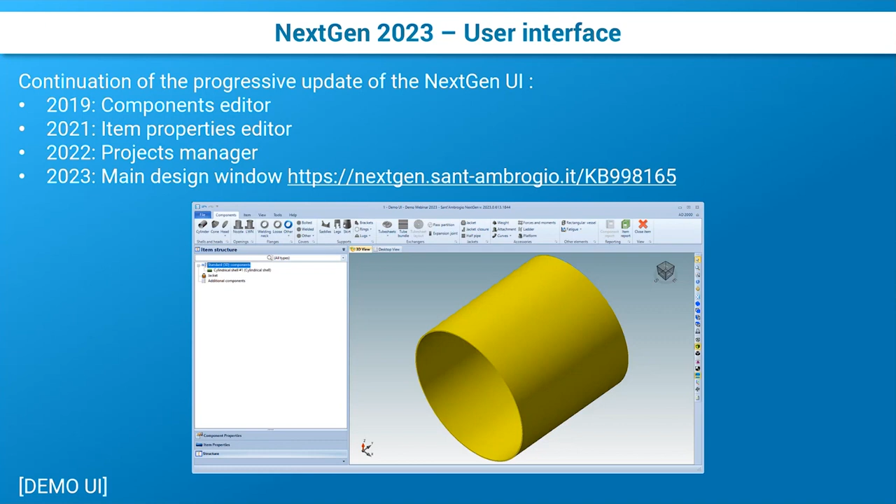Okay, as soon as you start NextGen, you have the project browser. This is the window that we already changed last year, and we added more features even in the last version. For instance, you can ask for support straight from this window. So even if you can't open your files, maybe you have some issues with your files, you can ask for support from here.

Then we added some tools here, for instance, the ability to open your materials database from here, check for updates, and some diagnostic tools that may be useful if you have some issues and our support team asks you, for instance, for the program log to be sent via email. So some small updates to this window.

Then once you open your NextGen, you notice that we replaced the toolbar on the top and the menu on the top with this ribbon bar that is more modern, but the interesting thing is that we are now able to let you know when a feature, a component, is not enabled, and the reason why that component is not enabled.

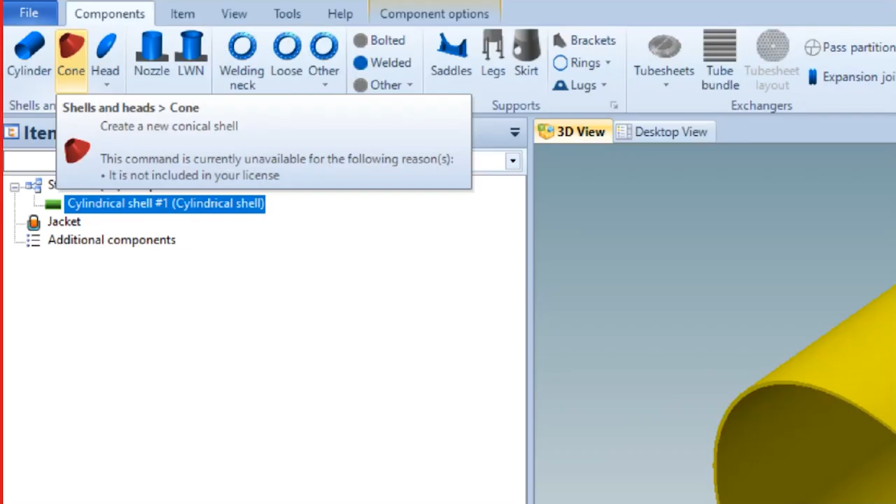So for instance, I have an AD 2000 calculation here with just a cylinder, and I'm trying to add a cone, and you see that my cone icon is highlighted in red, and the command displayed shows that this command is currently unavailable because my license does not include that. So we have an explanation of what's happening and why I can't use something.

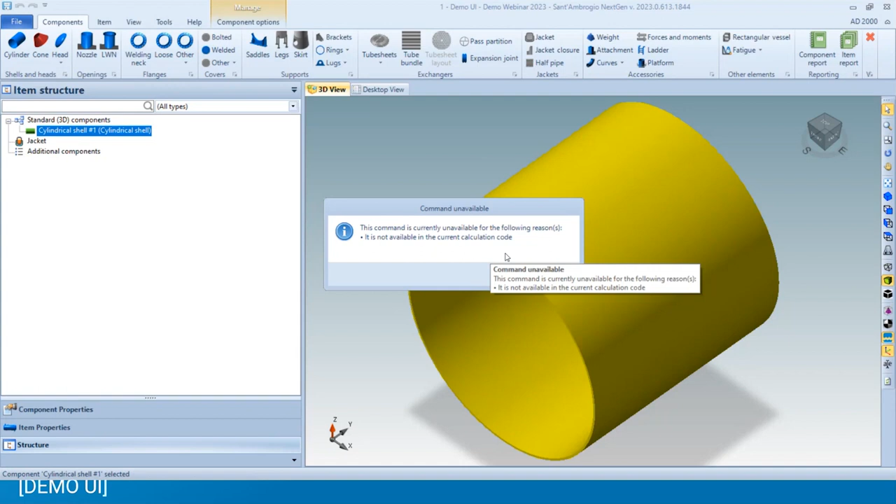This is quite obvious. It was already present in the previous versions, but we have expanded on it. For instance, here we have elliptical heads. Elliptical heads are not supported by the AD 2000 code. So if I click on the elliptical head, the program explains that I can't add this component because it's not currently available for calculation code limitations. Same goes for other components.

For instance, this one, brackets, you can see, let me zoom a bit in, that command is unavailable because it can be only available for vertical items. So I need to make this item vertical. Or again, because this component is available only for heat exchangers. So we have more a tooltip that explains why we can't do something, while previously we only had information about components and features that were actually available in that moment.

There are some other features in this new window. For instance, once you select a component, you already had in the previous version the right-click contextual menu, so the ability to act on a single component by right-clicking on it, and now we have expanded it with this contextual toolbar. And for instance, from here you can hide the component or make it transparent, or you can quickly change its color, if you want.

And other contextual options are available here, like the ability to insert components between other components. And so this goes in terms of discoverability of the features that are available to you. You have all the features available to you very visible within these menus. What else do we have?

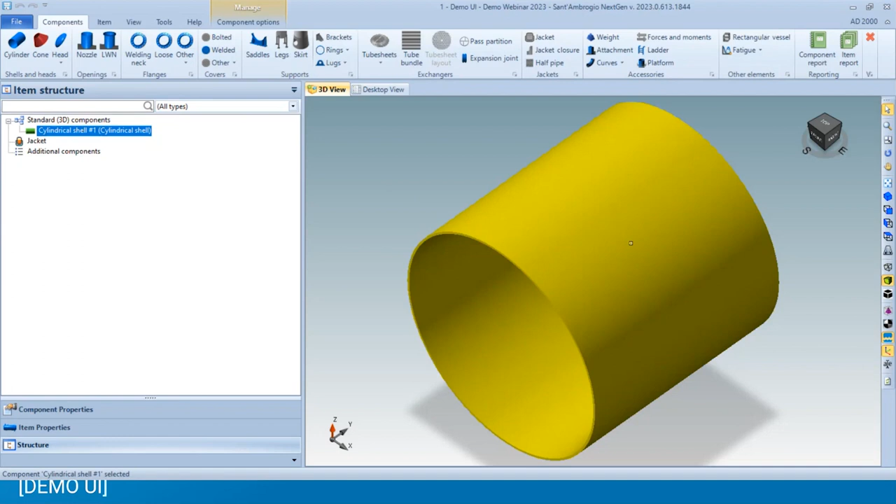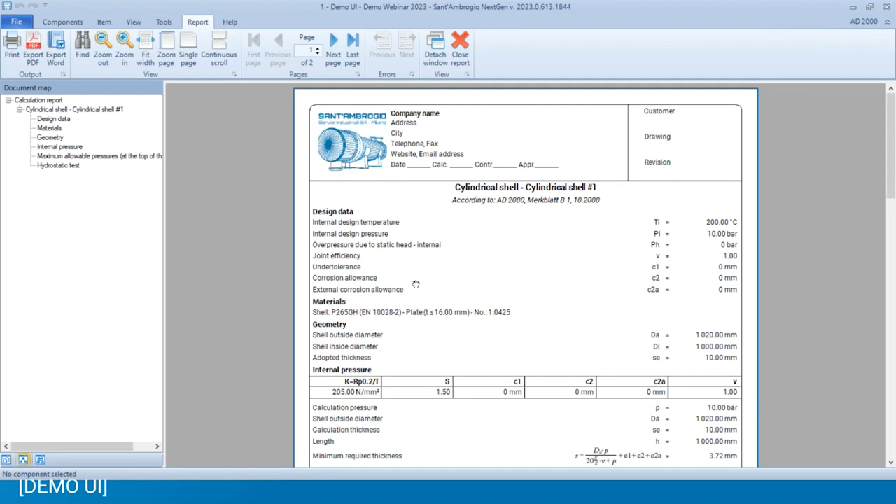One final word on the calculation report. If I print the calculation report, now the calculation report is integrated in the same toolbar, so you can switch between the report and the components window. But if you prefer an approach like what we had with NextGen 2022, you can detach this window, and you have a separate window for the report, and a different window for your 3D environment.

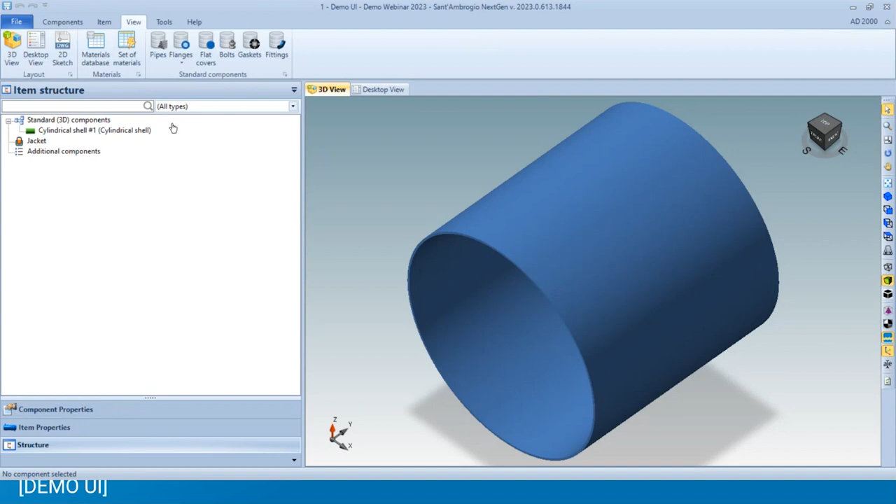So that's it. I think this is a good update that will let you understand better what you can do with NextGen, and also maybe discover some more hidden features that were buried under the menus and now are more apparent. Okay, let's close this item.

Don't save it. Sorry, Matteo, you have a question in the chat. Okay, let me check. Why is it not possible to add legs and skirt at the same time? Of course, one of them will be used, but sometimes I'd like to check which way is better.

Okay, this is by design, the fact that you can't add multiple supports on the same item. It makes it a bit difficult to manage which one is active, because, for instance, if you have both skirt and legs, the weight of one support would be added to the overall weight of the vessel, and act on the other support. So it would be a bit messy, I think. Also, in terms of user interface, you would see the two components.

So my suggestion here is just to create your vessel, add one support, and then duplicate your calculation from the project browser. You can duplicate from here, and then remove that support and create the other one. It would be a bit difficult to manage multiple supports.

Okay, let's continue with the presentation. Okay, we have seen the user interface updates, and now I would spend a few words about the usage factor. Usage factor is a feature that was present in NextGen since many years ago. Recently, in the last year, we have revamped it and polished it and made it more usable and useful.

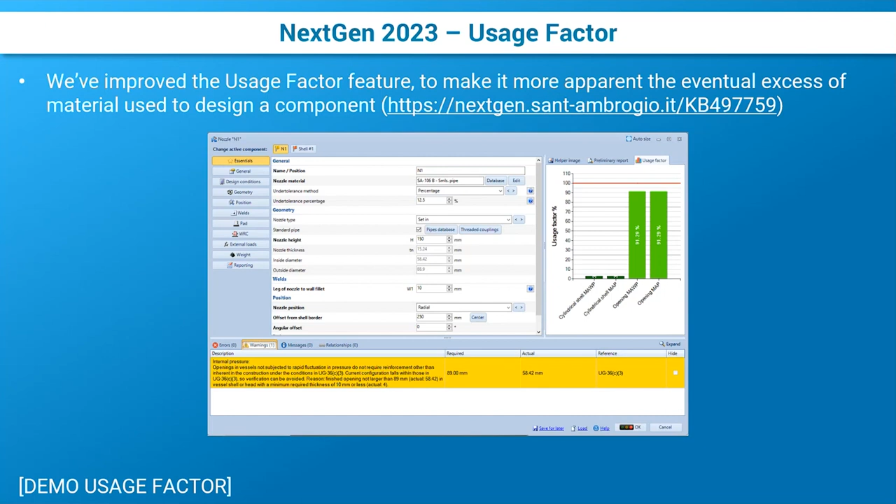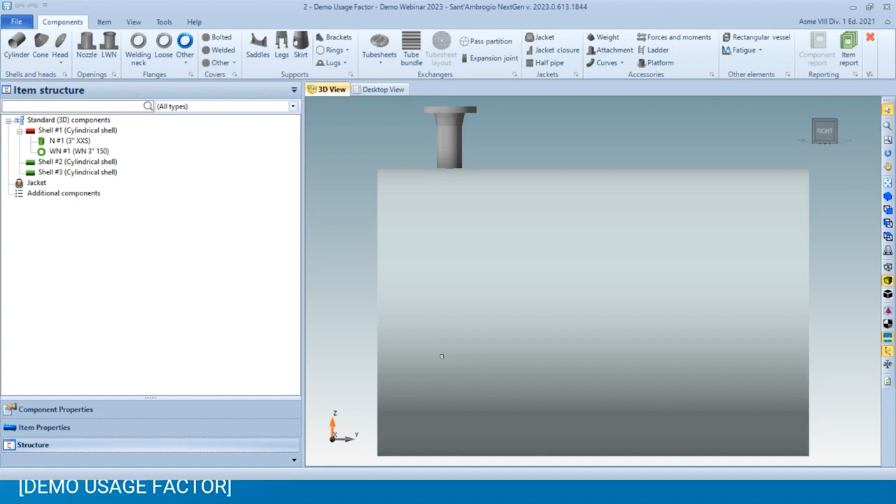So the usage factor basically is the feature that lets you understand how much material you are actually wasting in your calculation, because sometimes you have a scenario like this one where I have 3 cylindrical shells, you see, and obviously I have this cylindrical shell that is not validated, so I expect this cylinder to have insufficient thickness.

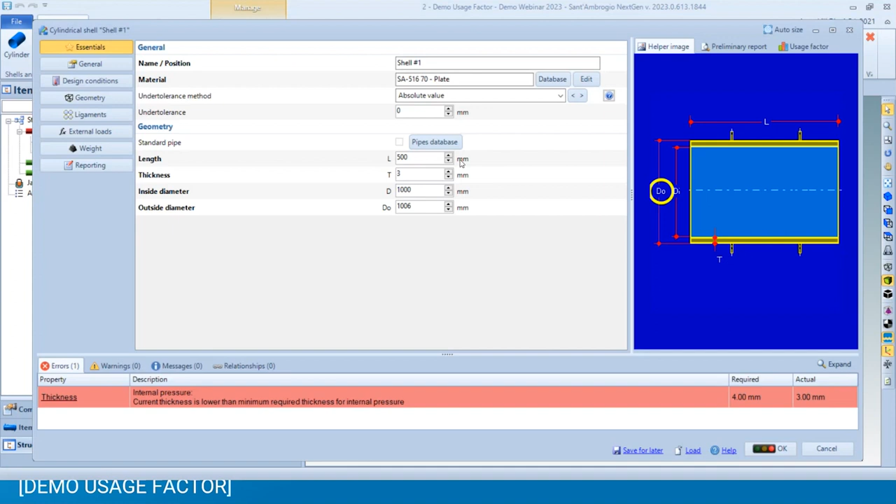So I can just open it, and okay, the minimum thickness is 4. Let's see. Okay, 4 is fine, and then everything is okay. So in this case, I expect my calculation to be fine in a way. But if we dig deeper, we see here that we have this component that is using almost all of its material, and the same goes with this one. But if we check this one, you see that we are wasting a lot of material.

This is how the maximum allowable pressure stacks compared to the design pressure. So it's a ratio between the two pressures, and we are actually using only 20% of our maximum allowable working pressure. This happens because I have a thickness of 20 millimeters compared to the minimum thickness of 4 millimeters.

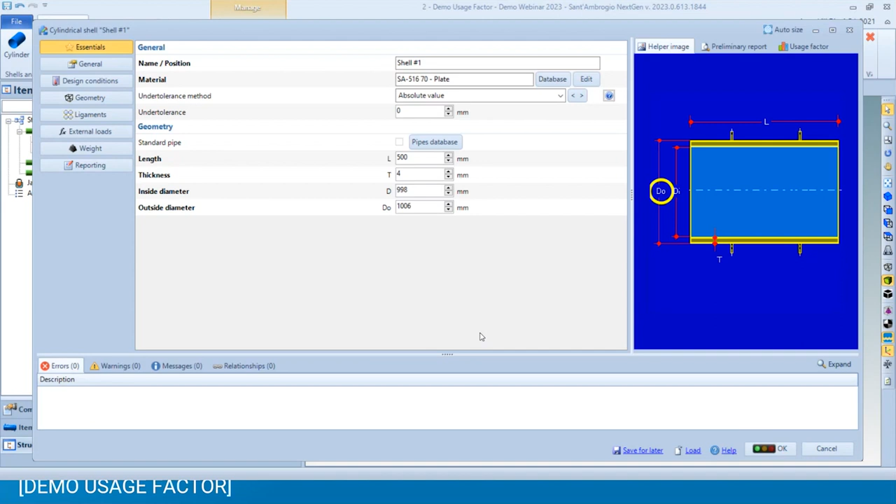So it's very obvious when you are under designing something with NextGen, because of course you have a validation error, and the best approach is to follow the direction given by the software and increase the thickness. But sometimes you are just checking a file, a drawing, for instance. So you input the value that is written on the drawing.

So let's say the cylinder is 10 millimeters, but how much more than needed is 10 millimeters? It's a lot more, because all the material between 4, that was our minimum required thickness, and 10 is actually wasted, not used to resist the pressure. So you are creating a more expensive machine, using more material, wasting more material, and overall having a more expensive project. So I highly recommend you check this feature out, because it can be very helpful.

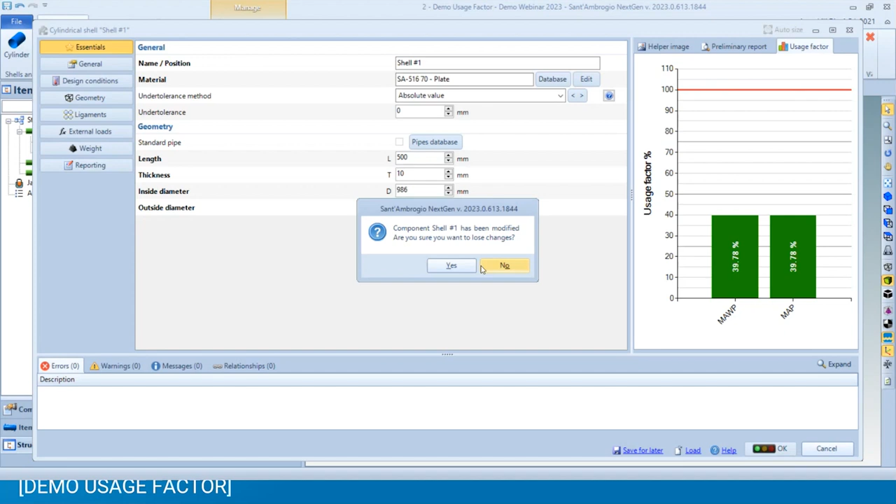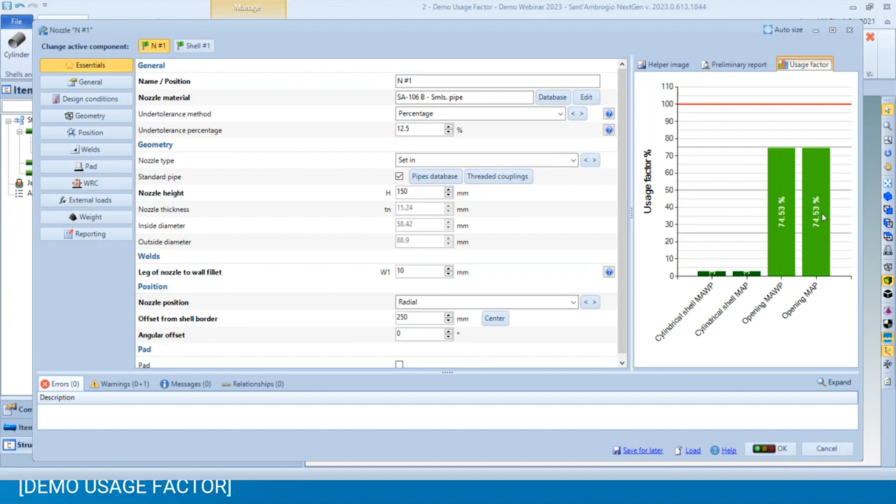Also with the nozzles, you have more information. In this case, we have the nozzle analyzed as a cylinder or as an opening, and obviously it is the opening that is guiding the process. So if you have this kind of chart, maybe you can decrease the schedule of your nozzle and use a lighter pipe. And same goes for flanges.

In this case it is a flange calculated not according to a standard, but with code rules. So we have the flange maximum allowable pressure and bolts maximum allowable pressure that are quite high. So we have a lot of material that is actually wasted. We can decrease the rating of this flange and use a lighter flange.

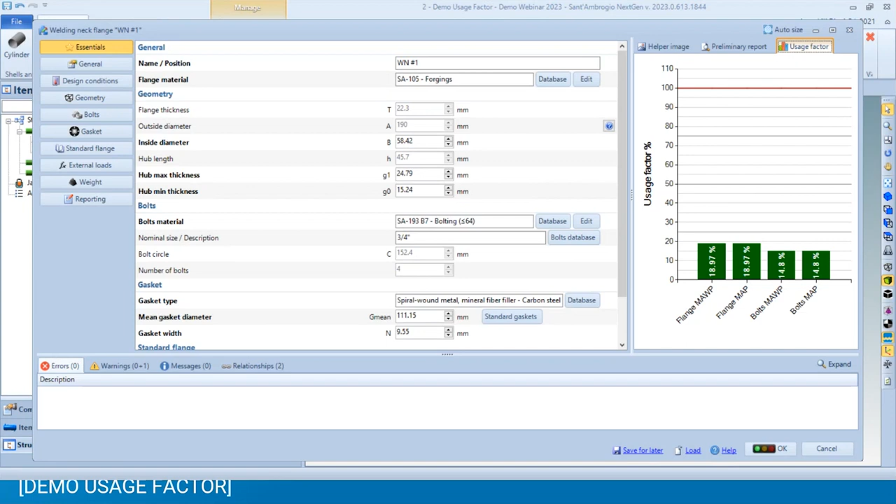And other than the usage factor within the component window, we also have the global usage factor. Under tools, you can use usage factor here and add one or more components and see how they stack one against the other. So we have these 2 cylinders that are using almost all their material to resist pressure, while the other one, C3, that is cylindrical shell 3, is oversized.

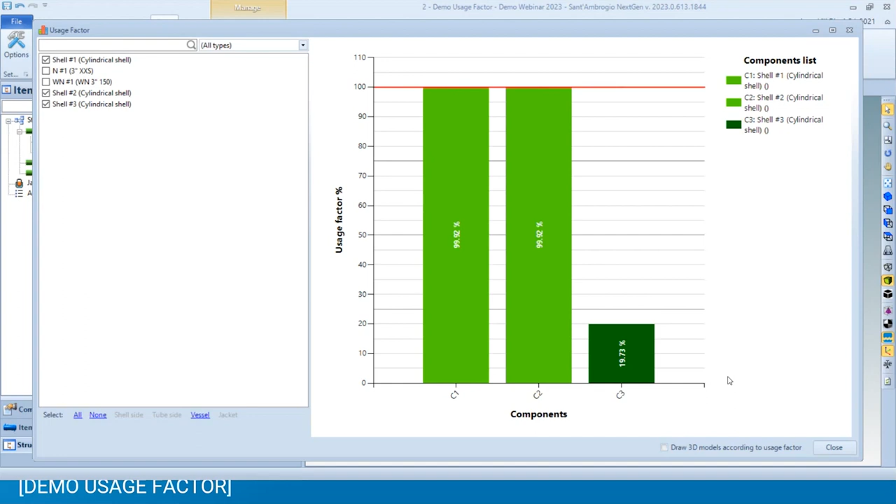Okay, we have a couple of questions. Is it possible to import files into NextGen from other pressure vessel programs? I'm afraid no. This is something that depends on every producer of software. We are kind of jealous of our file formats, so it's not very easy to interchange files between one another.

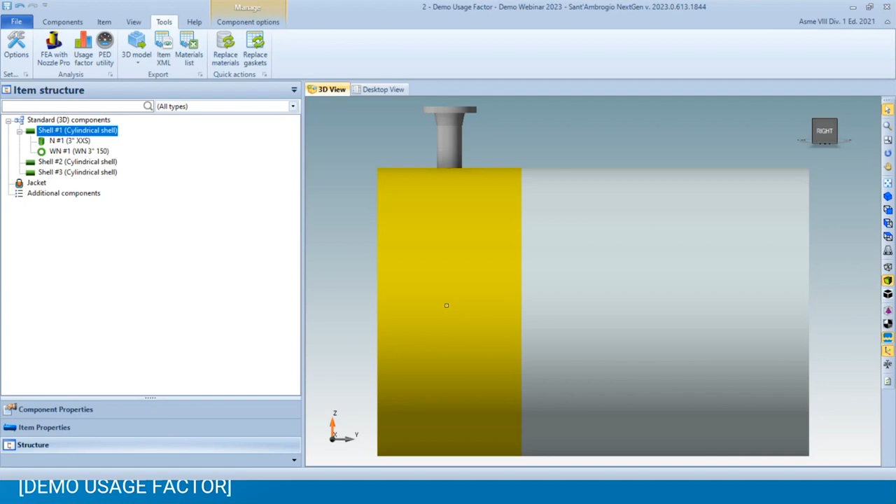Does usage factor compare to maximum allowable working pressure of the vessel or to the design pressure of the component? That's a good question. I think it's the design pressure of the component, because you usually have the same pressure for the component and for the whole item, but it could happen that you have different pressures there. Let's see what happens if we change the design pressure here and go down to 1. Only on this component. Yes, it changes.

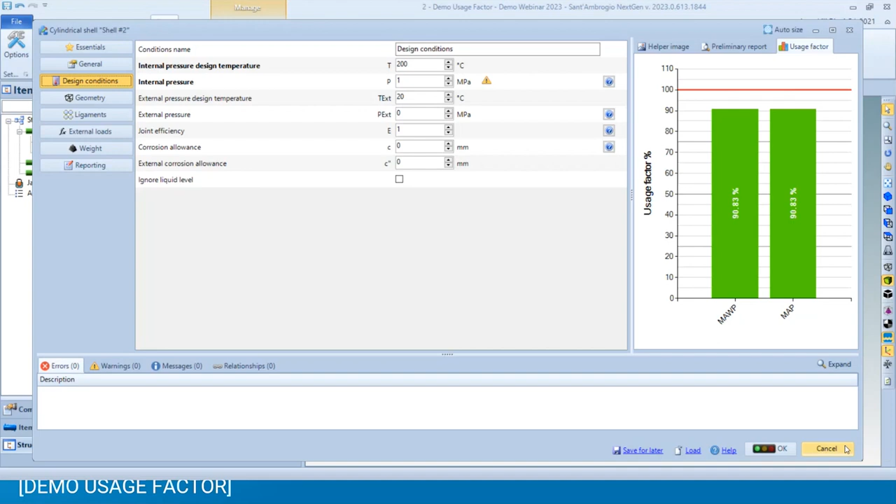So the component checks the ratio between the maximum allowable working pressure and the design pressure on a per component basis. Okay, that's it for the usage factor. And let's see what else we have.

Okay, calculation report. In terms of calculation report, we have made a lot of improvements in the last year. And we have now, first and foremost, the ability to produce a report using the current code prescribed units. This was available in a way in previous versions, but now it's more explicit. So if you want to stick to the units that are available for that specific calculation code, and I'm thinking about AD 2000 using bar for pressure, while other codes use megapascal.

You can do that. We have the printout of the local loads transposition to the support. This is available for vertical vessels, so vertical supports like legs and skirts. So if you have local loads applied to some of your nozzles, these loads are transferred to the base of the support, and now we have a page that shows you how these loads are transposed to the bottom of the vessel.

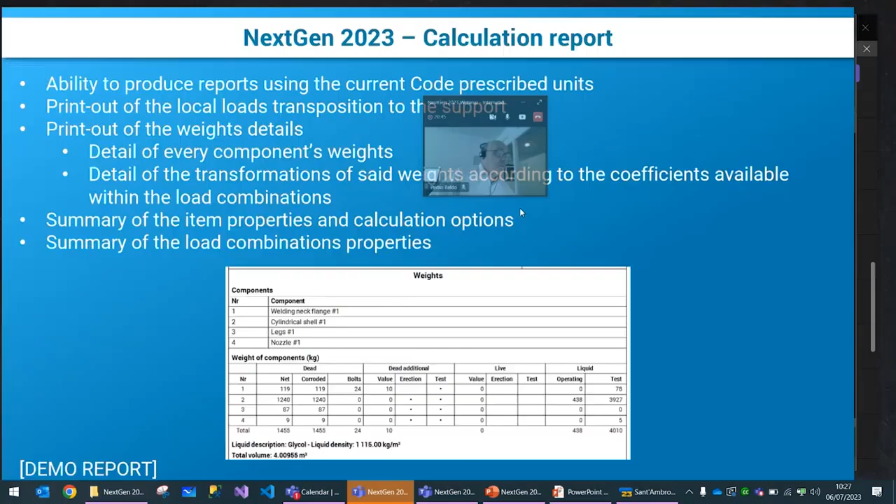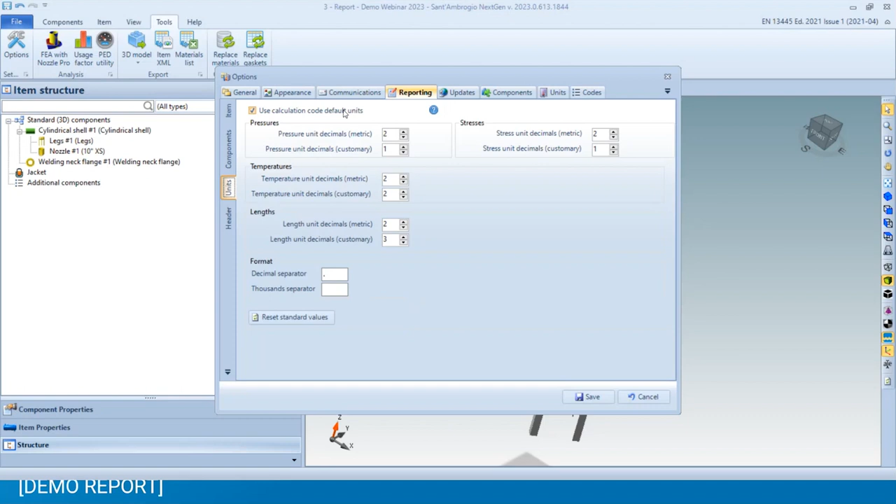Okay, report. So I have a vessel on legs here. And as I said, one thing that you can do now under tools and options and reporting for the units, you can stick to the calculation code default units. And this is an explanation of the list of the default units for each calculation code. Then let's print the global report and check on that.

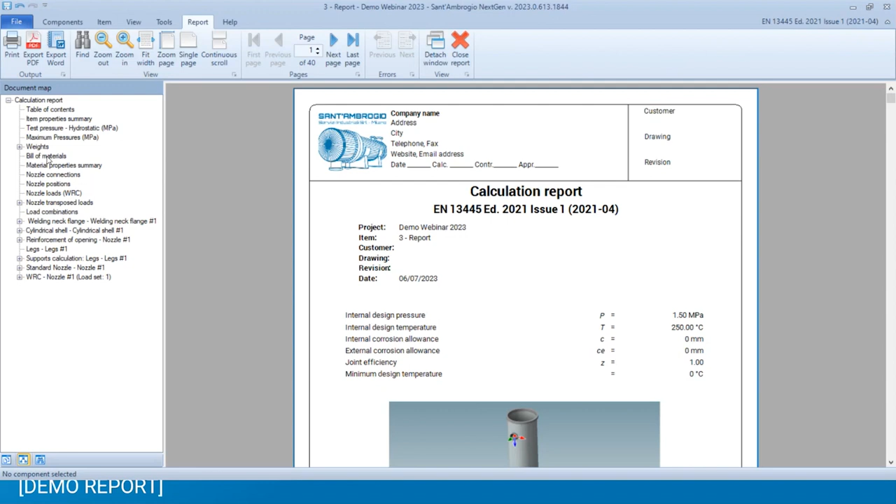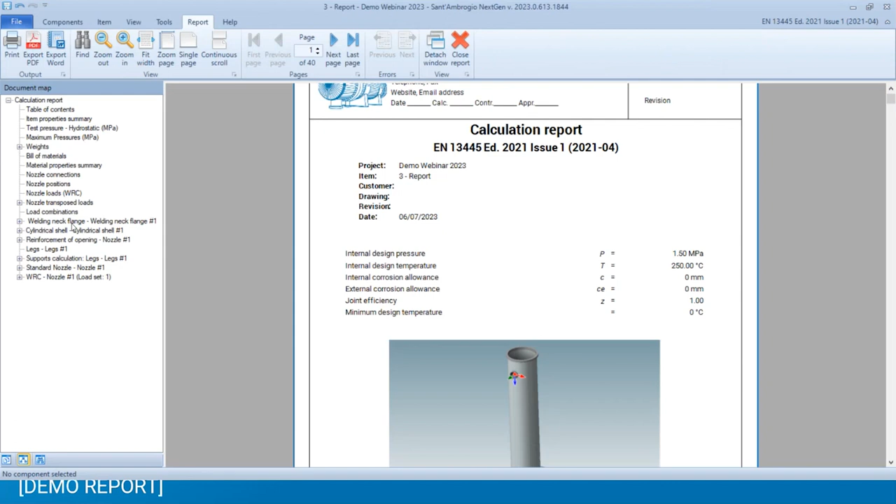Okay, this vessel has a nozzle here, and the nozzle you can see from the icon that you can activate by using this button here. You see that it has WRC enabled and local loads. So if we check the report, we have now the nozzle transposed loads. So this is the transposition of the loads acting on that nozzle down to the support. And this should be available also for horizontal vessels on saddles in the near future.

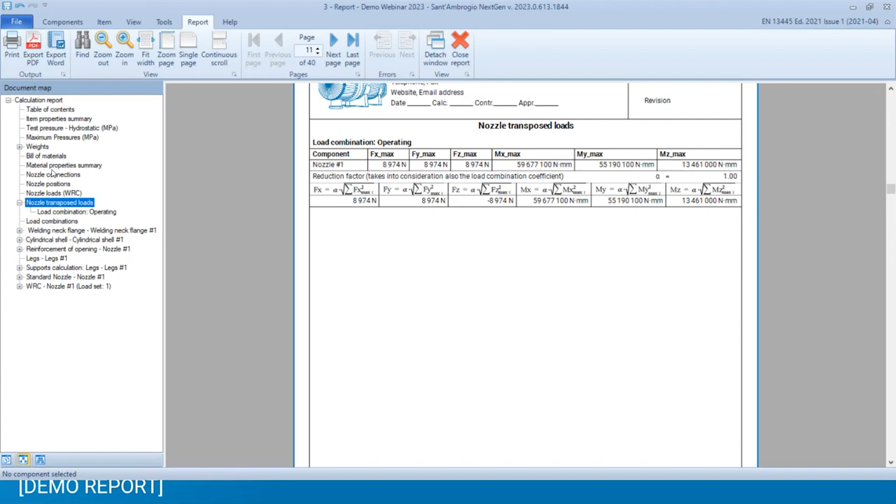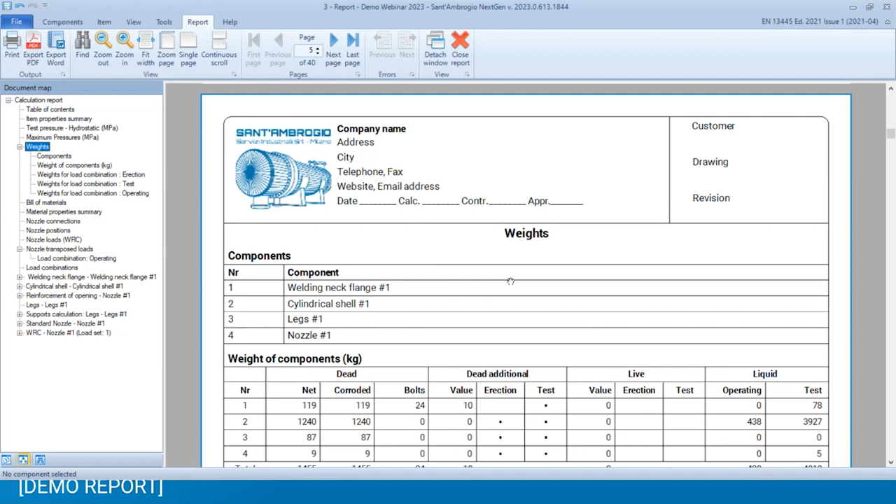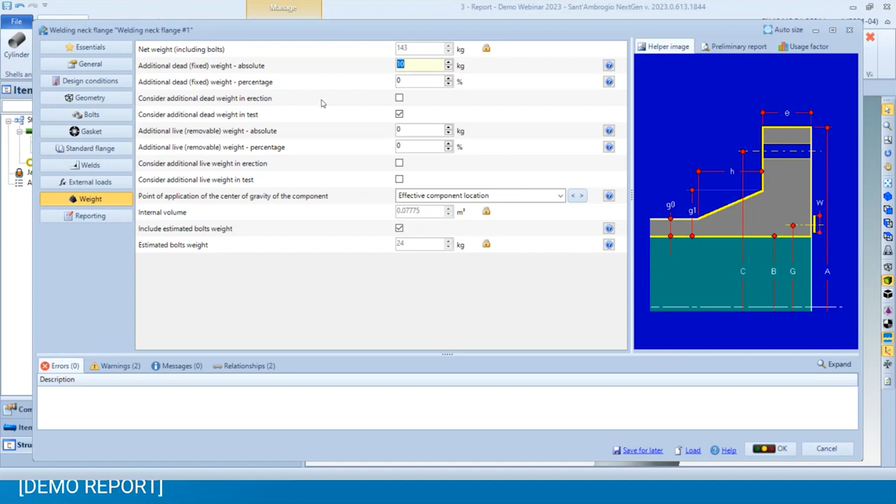Then we have the weights details. Okay, the weights page has been greatly improved now. You have the list of the components, and for each component, let me zoom in a bit. For each component, you can see that, for instance, here for the welding neck flange number one, we have included the weight of the bolts, and this is in kilograms, so 24 kilograms of bolts. And we have asked to not consider that weight in erection. This is something that you can manage from the weights page, weights category of the component. You see here, I have added 10 kilograms of dead weight, and I have asked not to consider that weight in erection. So we have these features reflected in our calculation report.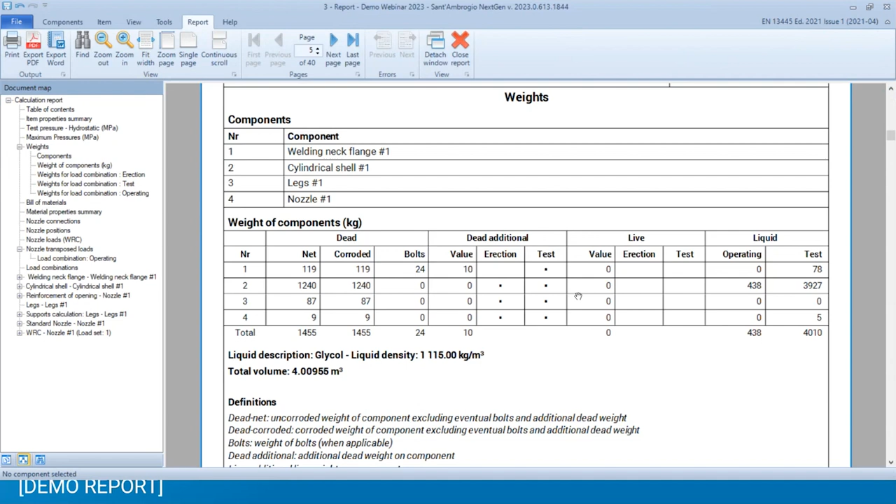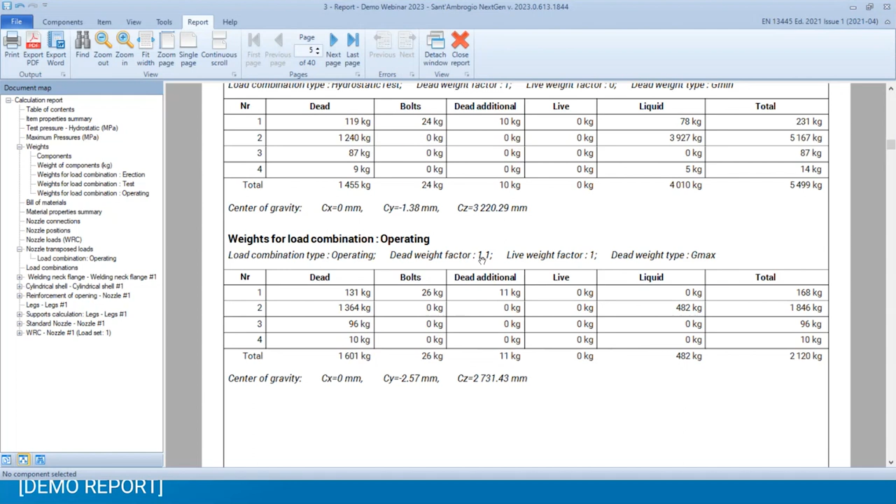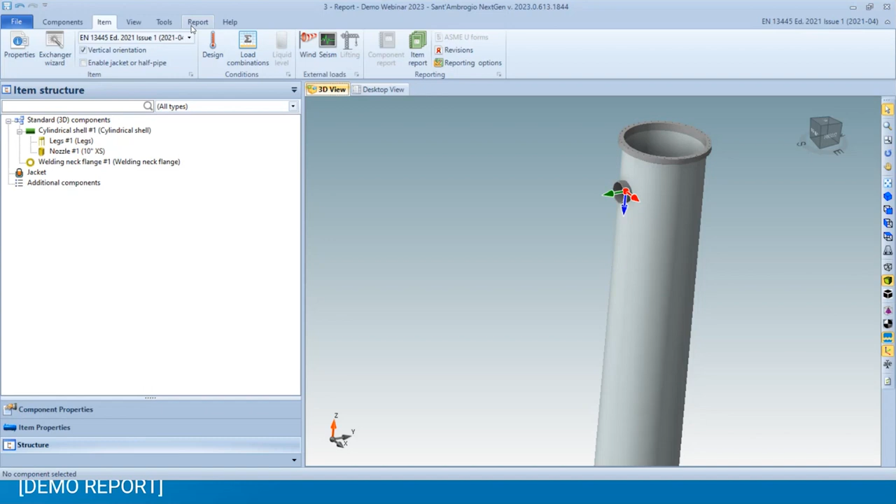And then what else we have here? We have the transformation of the weights due to the load combinations. So I have changed the dead weight factor to 1.1 for the operating condition. And again, you can manage your load combinations from here, edit. And you can see here, 1.1 as dead weight factor. So if I see my weights increased in the operational load combination, it is because I have multiplied each weight by 1.1. So I have a more precise way to explain why my weights are changing when transferred to the bottom of the vessel.

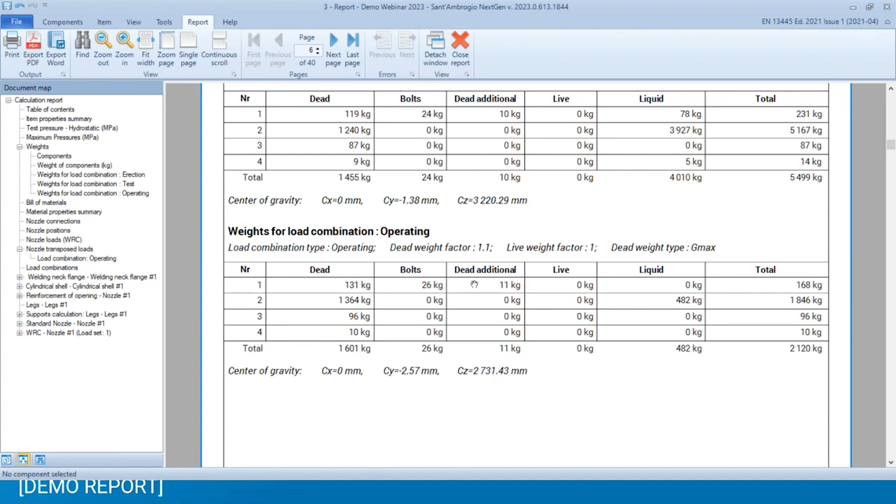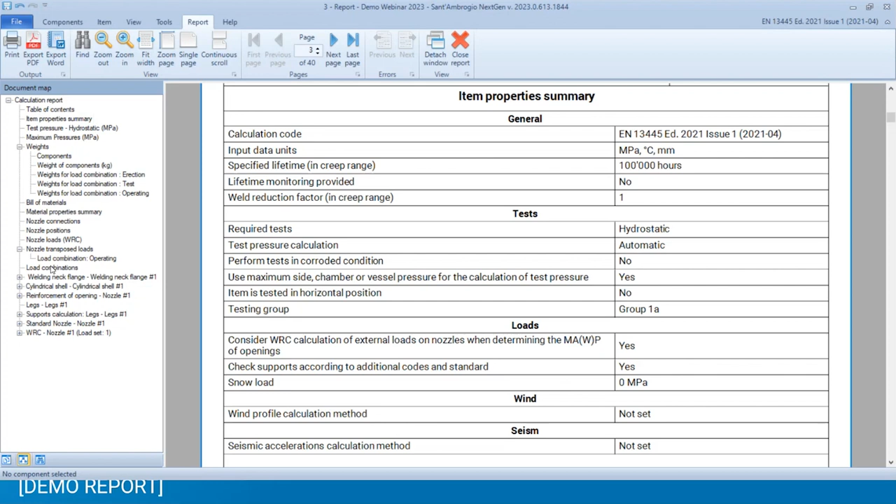And we also have a recap of the item properties. So these are the properties that you set when you set up your item, which test is enabled, if we included or not some of the options. And this can be helpful if you want to recheck items in the future and see how you managed to set them up. And finally, we have revised the load combinations recap.

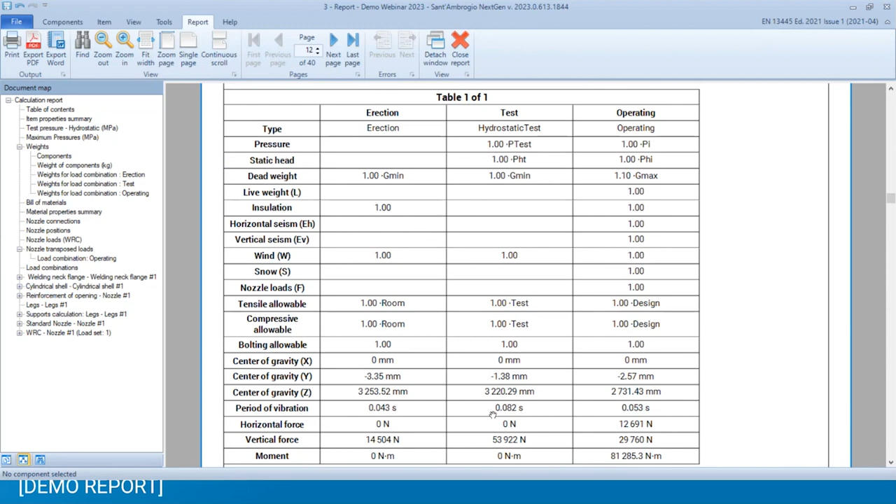So you have this summary with the load combination, explanation of the symbols, and a recap of the factors of each load combination. So this is again a progressive update of our calculation report, and we are including more meaningful information, especially in the structural calculation, ways to better understand how the vessel is behaving and how each load and weight is transferred down to the support.

Okay, I'm checking. There's a couple of questions. Is it possible to change the way loads are transposed? Some clients ask to transpose the loads using their own formulas like square superposition or reduction factor depending how many nodes are combined. At the moment, we can't change the way the loads are transposed. We are using the AD 2000 method.

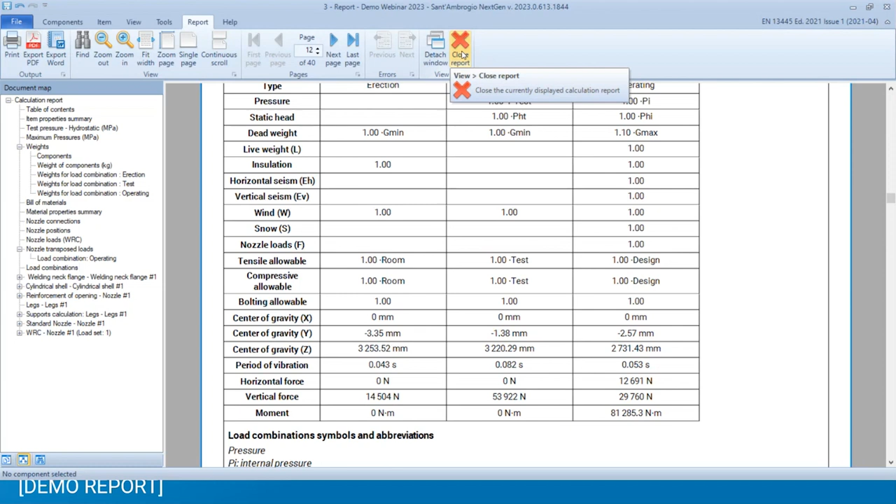Maybe we can check for the future if it's possible, or keep in mind that you can always override the calculation that we make for each load combination from here, and override automatic calculation. And of course, you lose everything, because not only the local loads, but every other load calculation. But this is an option that you have. Sorry, question? I want to add something, Matteo, in the load combination details window. Yes, please.

If you click on edit, you can actually choose the combination method of external forces from SRSS to algebraic sum. So we added this recent improvement to allow also the algebraic sum and not the square root of the sum of the squares. So okay, this is possible. Okay, great, thank you.

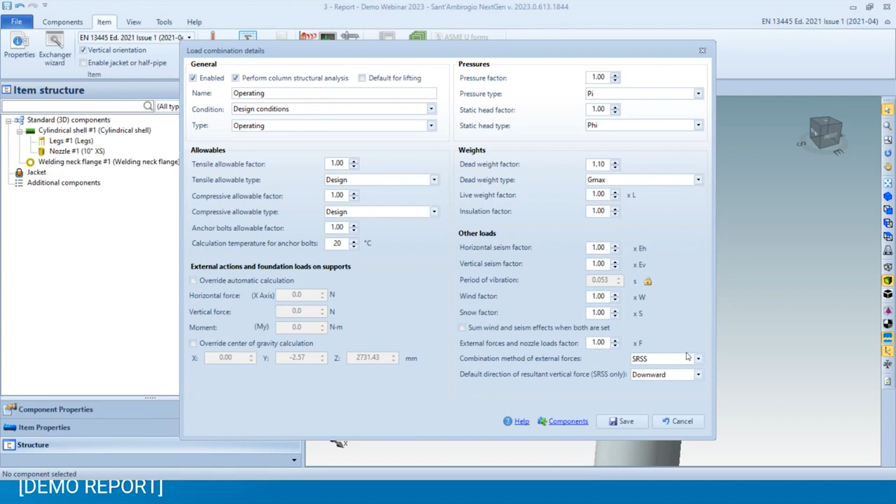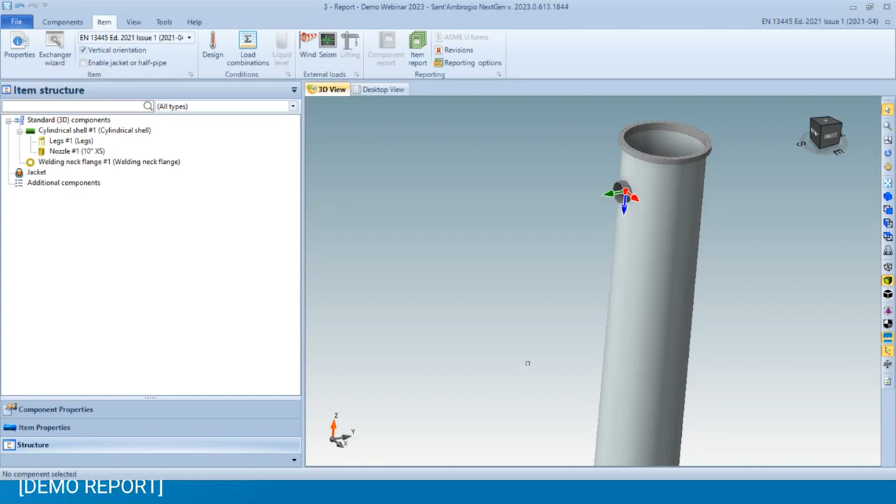By the way, this is Paolo, one of my colleagues from the office, and there is another question: why can't we add coils to the conical part? Well, basically, the answer here is that it is pretty difficult to draw the actual model of the coil around a cone, but I think that eventually we will add that feature too.

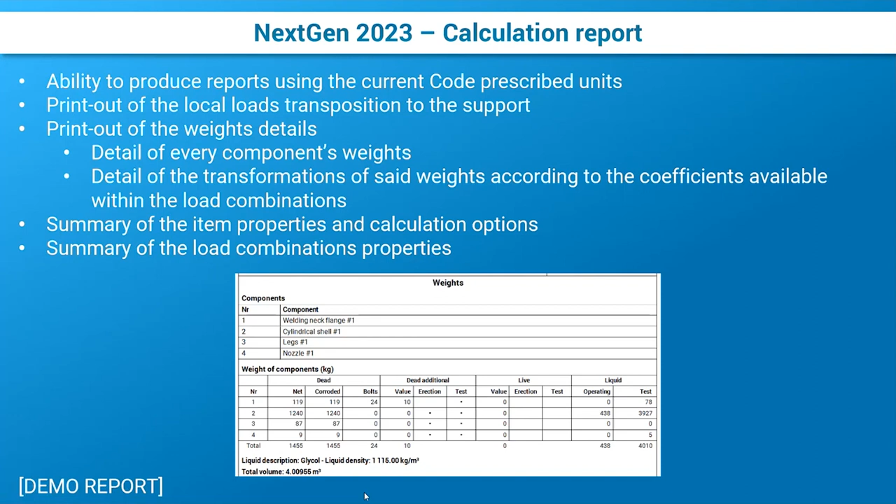Okay, let's see what else we have. Improvement to rectangular vessels. Here we were lacking externally reinforced vessels under Division 1, and we added them at the beginning of this year. So we now have a complete coverage of both internally and externally reinforced vessels in ASME Division 1.

Then we added a bit subtle feature that is the option to select which method to use to calculate the minimum thickness of a rectangular vessel face. This is displayed in the image below. So we have different methods to calculate the minimum thickness of the vessel face. This happens because the rectangular vessel method doesn't give you actually a minimum required thickness, but gives you means to check stresses in different points of the vessel, and so we have to come up with a trick to calculate a minimum thickness. This is especially useful when you are calculating openings, because openings use the excess thickness to reinforce said opening. So you have the ability to select which method you want to use.

And then we extended the support of screw clamps and hinged bolts, so every means of locking that is placed outside the boundaries of the flange itself for rectangular flanges. Rectangular flanges are available in NextGen according to the PD 5500 method, and are available in every calculation code.

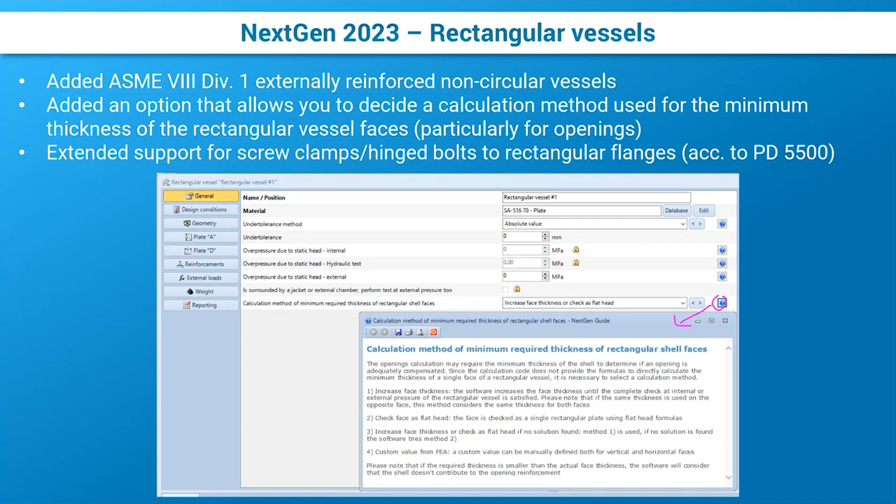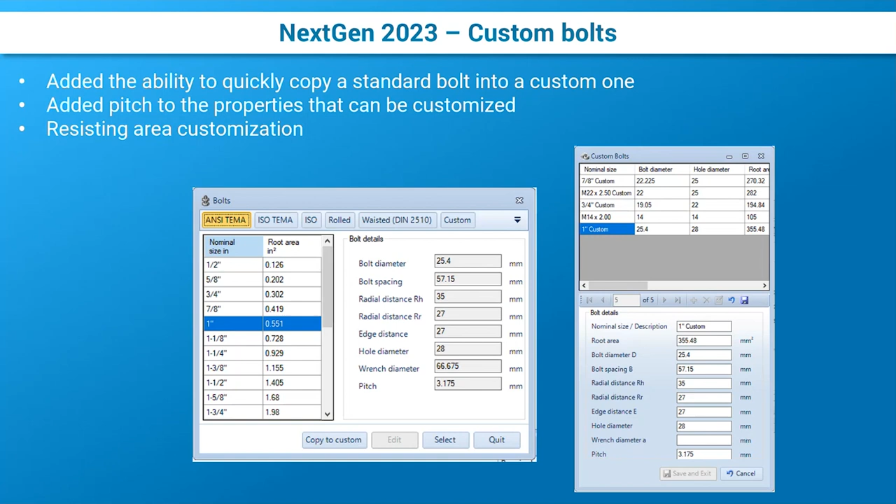We made small improvements to the custom bolts. Again, this is part of our progressive improvement of usability of the software. So you have now the ability to quickly copy a standard bolt into a custom one. This is a very needed feature, because otherwise you had to fill all the values by yourself, even if you wanted to change just a few values from a standard bolt. So you can copy that from the standard database to the custom database in the same way that we already do for custom materials. And then we added the pitch property to be customized, and the resisting area customization.

For jacketed vessels, we made improvements in that area too. Especially, we added the inlet and outlet nozzle support for the half pipe. So if you have a half pipe, of course you need to add a couple of nozzles for the inlet and outlet of your fluid. That wasn't possible before, and now it is possible. So you can add two nozzles, one at the end and one at the beginning of the windings.

Then we added a couple of options for the additional components, the non 3D components, that let you specify if the additional component that you are designing is part of the jacket or if it is covered by the jacket. This helps you in determining the design condition for that component, because if it's under jacket, the program automatically makes the adjustments to the pressures to take that into account. And the same goes if the component is part of the jacket: it takes the design condition of the jacket and not of the inner vessel.

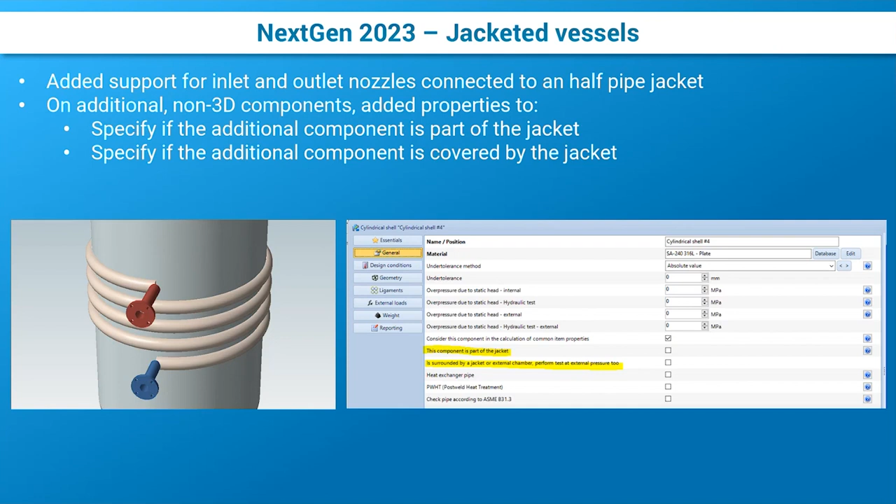We have a number of updates for the non-pressure loads. So we added the ability to add a customizable load set manageable with Excel. In WRC, we added API 660 as a load set. We then added a property to specify how WRC affects the calculation of the maximum allowable pressure for each opening. We changed the WRC moments default unit to Newton meters compared to Newton millimeters that were available before. Then we added the ability to define a custom area loaded by the snow.

We added a new component called forces and moments that lets you specify an arbitrarily positioned set of forces and moments acting on a vertical vessel support. And again, this eventually will be added also for horizontal vessels.

And we now have the ability to connect flange lugs to reinforced rings to move your vessel or to erect it, and the ability to connect lifting lugs on flat covers. Remember that WRC is not available for attachments on flat covers, so you only have the ability to calculate the dimensions of the lifting lug and not the actions of that load on the flat cover.

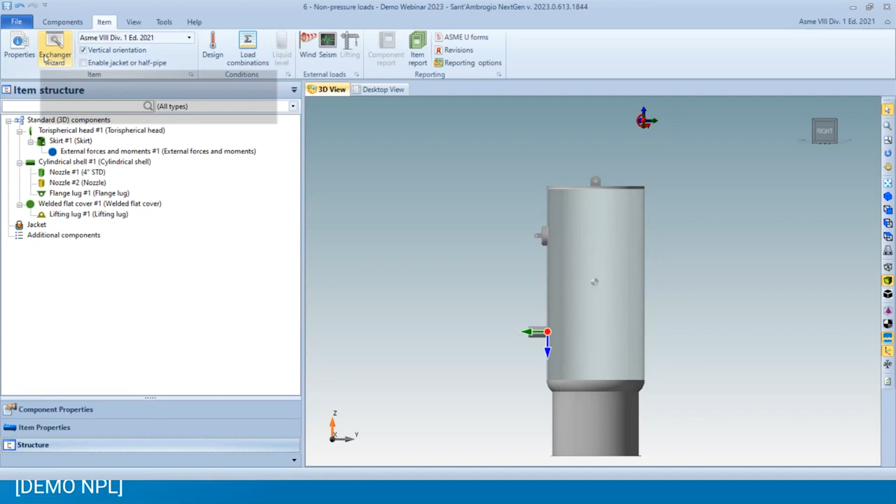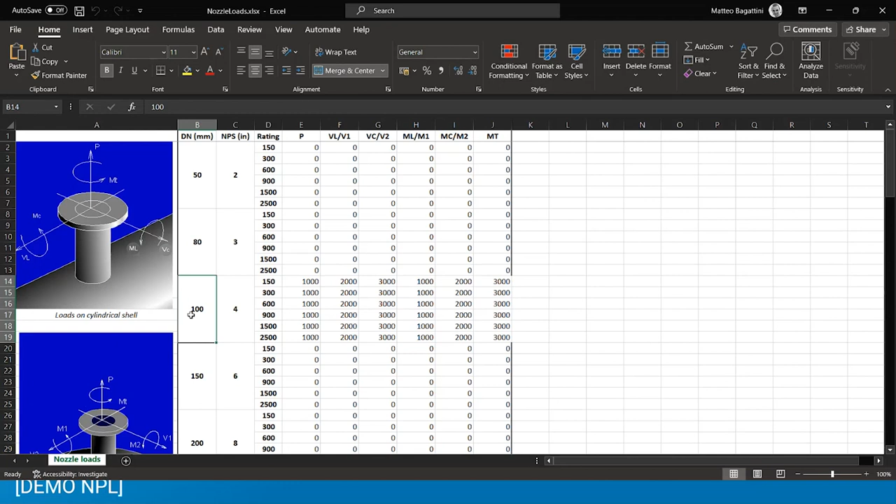Let's see something in NextGen about this. So the first thing that I want to show you is the fact that you can customize an Excel file that we have included. And you can find it under Tools, Options, by opening this folder. You see here that the program created a nozzle loads file, and I have inserted these values here for the DN100,

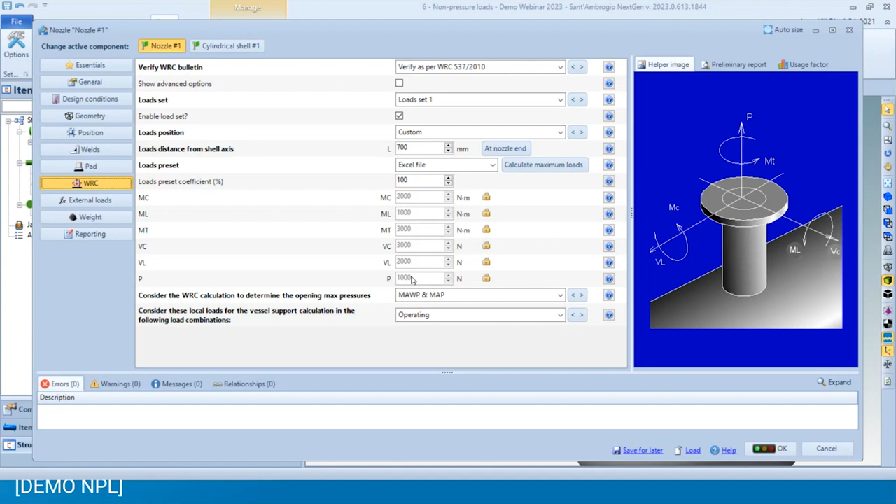and now my nozzle here is using WRC with a custom Excel file, and it loads from that file my specified load set. So we have this nice feature that lets you customize the load set that you're using, and of course we have other standards included, including API 660, that is the latest addition that we made.

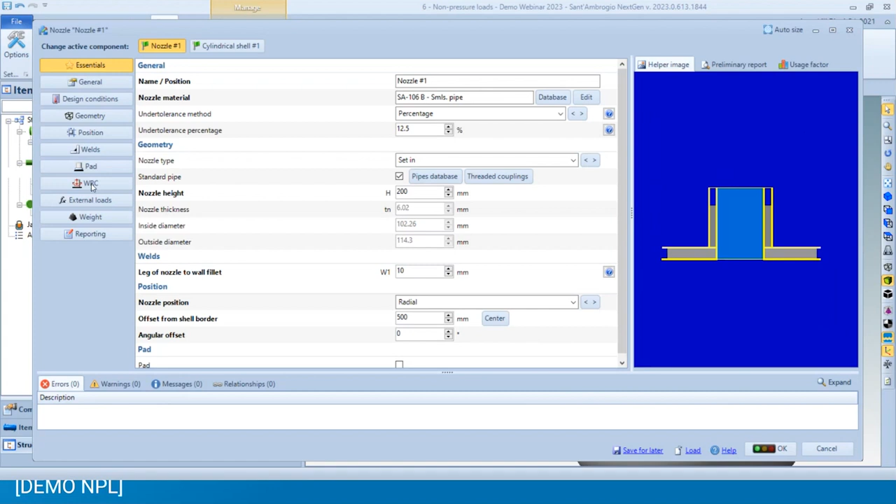Then for each nozzle and opening, again under WRC, you can see that we can consider WRC in the determination of the opening maximum pressure, and on each opening we can select if WRC affects the maximum allowable working pressure, the maximum allowable pressure, or none.

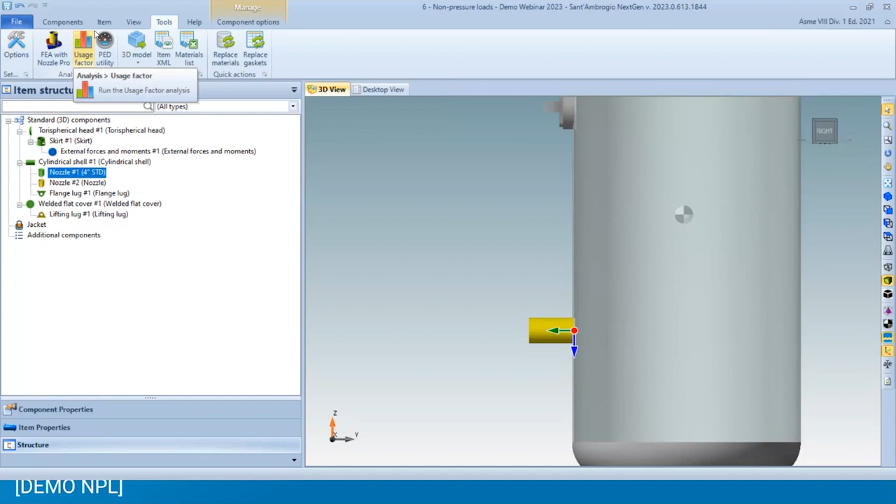As for the snow, under the item properties and under loads, you have now the ability to specify both the snow load and the snow area. If not specified, it's just the surface, the visible surface from top of the vessel.

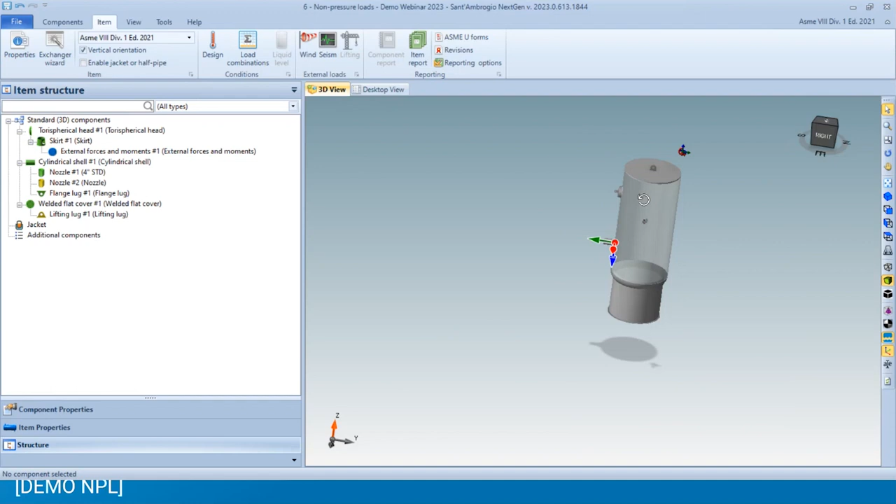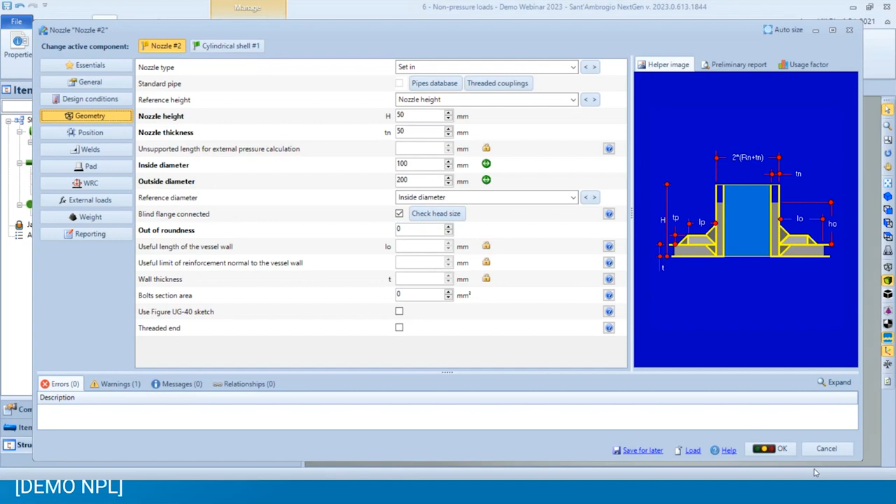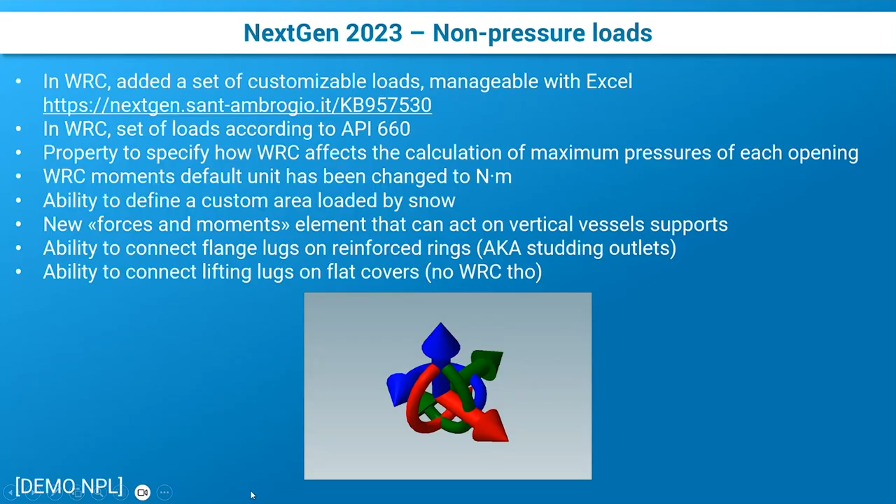And as I said, you can now add lifting lugs on covers and flange lugs on this type of nozzles. This is a nozzle where I have specified under geometry that a blind flange can be connected. So this is a studding outlet or a reinforced ring, and then you can add a flange lug to erect or move this item. So a nice set of new improvements in terms of non-pressure loads.

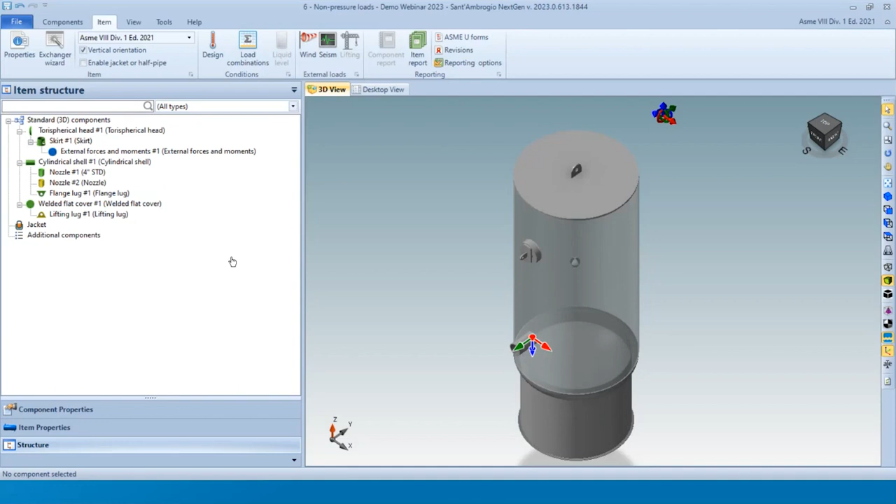Sorry, Matteo, you have a couple of questions. Oh, let me check. Okay, regarding WRC of attachments, standard vessel pressure is set to 0. In my opinion, it would be useful to be able to copy components pressure. Standard pressure is set to 0? Sounds strange to me. We usually include the pressure in the calculation and let you override that. Yes. Here in this vessel, I have a pressure of 0.5 megapascal, and it is considered.

Maybe you are not talking about nozzles, but attachment. Okay, yeah, square attachment, not the nozzle. We can look into that. I'm not sure that it must be considered. We can look into that and eventually behave in the same way that we behave with nozzles. Okay, thank you for the suggestion.

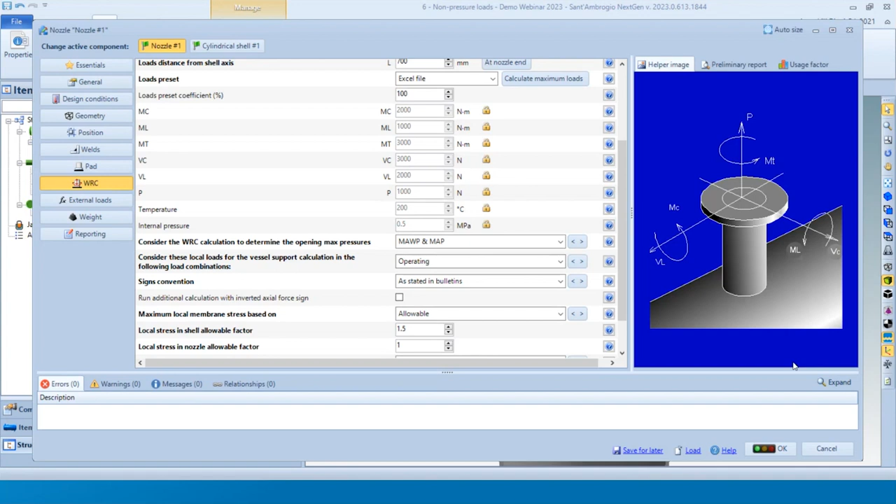May we use many Excel files for custom nozzle loads or only one? Okay, out of the box you can use one, but nothing prevents you from swapping the files behind the scenes. We always read the nozzle loads.xlsx. So you can copy and paste that file and make multiple copies. For instance, I can copy paste and call this scenario 1. And once I start the program, it reads the loads from here, and I can swap the file and always use the file that is named nozzle loads.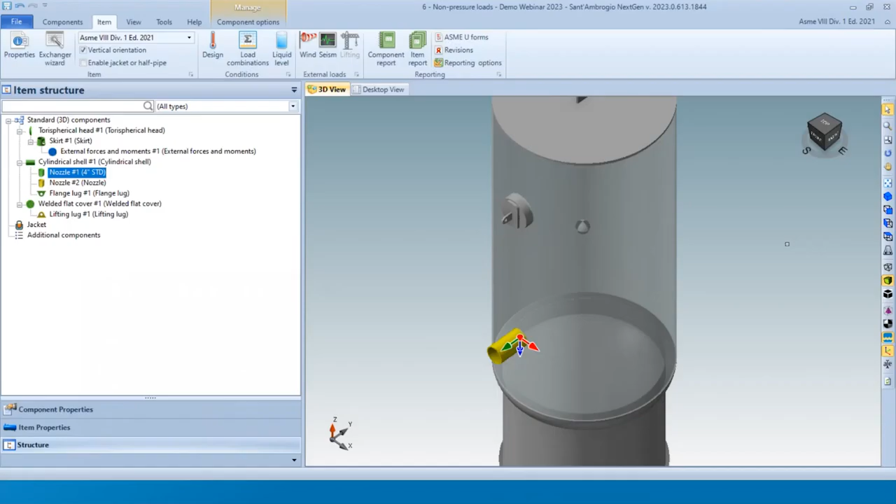Also for the attachment in the preliminary report, allowable stress is only shown when the component fails. See the acting stress component. Okay, I kindly ask you to submit these questions about the attachment to our support team, and we will look into that in the coming days. And I think we can improve on that area. Thank you for your suggestions. And of course, you can send a customer request from Ask for Support from here. This is a bit more of a suggestion than a question about how to do something. So that's why I'm asking you to please send via Ask for Support.

Okay, so we have made some corrections, particularly concerning the calculation of the C1 coefficient for AD 2000 U-tube tube sheets, and also a correction in terms of corrosion and tolerance consideration in EN 1591, and we corrected an error that was present for cones in ASME Division 1 concerning the diameters in different points.

We also had some problems with customers starting up the program, having issues opening files or even starting the program itself, or dimensions of windows that were behaving a bit crazy. So we fixed all of that, and as always, we have a list of changes available on our website.

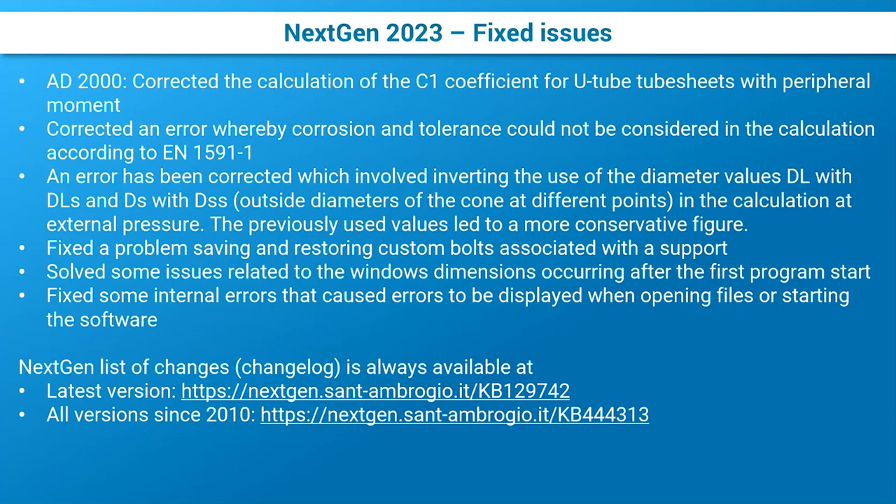Everything else: we have added openings on flat heads according to Division 1, UG-39 D and E. There are additional calculations that can be performed now. The tightening torque for flanges calculated according to EN 13445 Annex G or EN 1591 can now be calculated according to the Annex G.8.4.

This is useful for our Italian customers, but VSR added the possibility to use a custom hydraulic test that is lower than the one calculated by the calculation code. That is in contrast with what's happening in other codes, but according to the Italian code, it is possible to use this under certain circumstances.

And in the next release, we have added the customizable lowest stress ratio for every code. So if you have a component that is determining the lowest stress ratio that is not modeled inside NextGen, you can insert the lowest stress ratio and determine the hydraulic test pressure by using that.

For our large companies, customers may be interested in the fact that you now have new command line installation options. So if you need to distribute NextGen on multiple computers, you can manage it by distributing via command line. We have a new way to calculate threads, also available for ASME calculations.

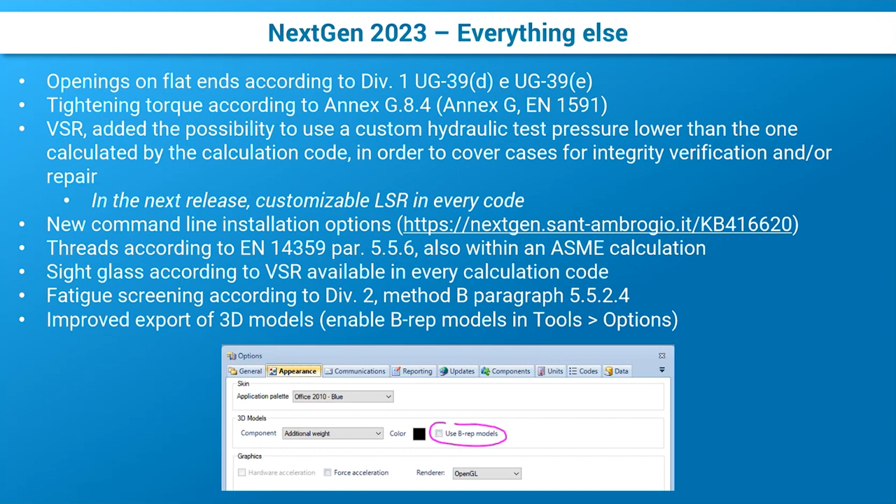So if you need to export your 3D model from NextGen to your 3D environment, please make sure that you have enabled the BREP models in the export options, so you will end up with a more precise model.